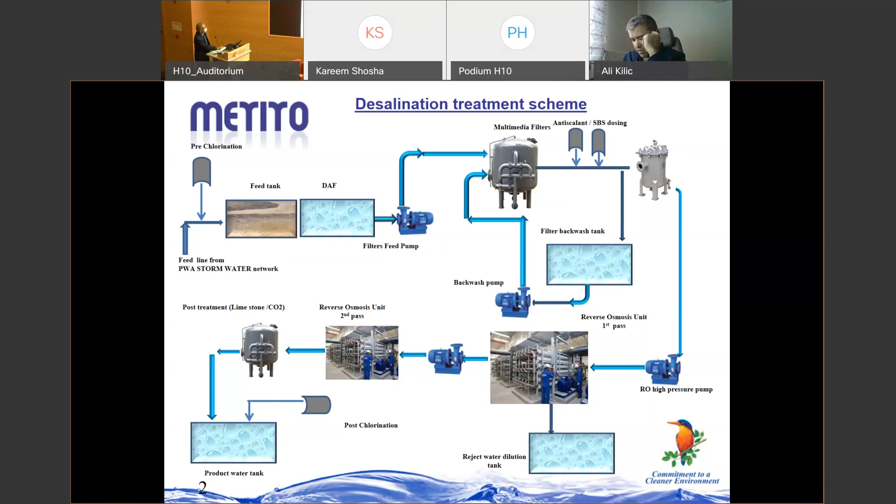So this is in broad what we call as a technology selection. So what is involved in this technology?

We all know seawater has algae, oil, suspended solids, total suspended solids (TSS), and a high silt density index. This is what is removed in the first three steps of pre-treatment.

Then you have chemical dosing systems to minimize scaling on the membranes. You also have to remove chlorine, because chlorine is poisonous for the membrane. So you do dechlorination using sodium bisulfite to remove chlorine.

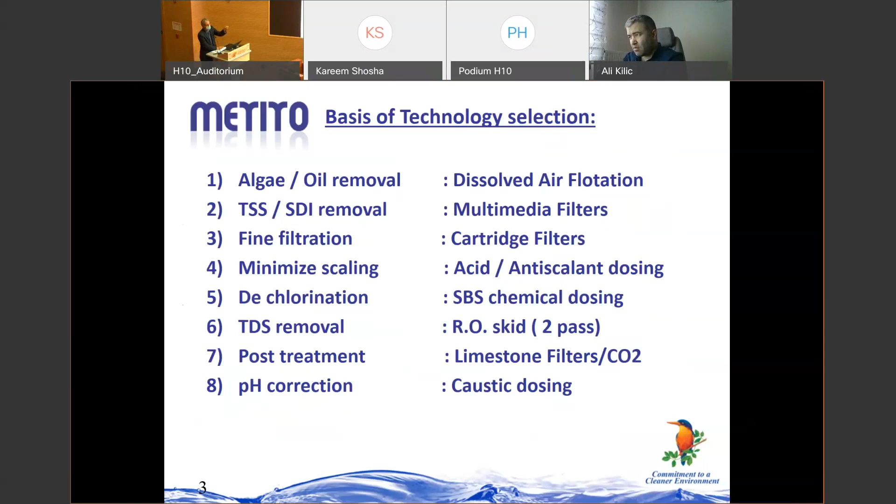And then, of course, the heart of the process, the reverse osmosis skid, post-treatment, and last but not least, pH correction, so that the water is suitable in case it is to go for drinking use. We have to correct the pH to make the water eligible for drinking.

Now, having seen the treatment scheme, let me jump into what the challenges are, and then I will move on to how we address these challenges in Metito using some innovative technologies.

Broadly, we have the major challenges. The first and foremost is a receding coastline. We know there is pollution due to discharge, especially in the Gulf. The Arabian Gulf is a very narrow strip of sea, unlike other areas in the world like the Indian Ocean or Pacific Ocean, which are more open. So in the Arabian Gulf, especially when reject water is discharged, it causes pollution. This is the most important challenge.

Due to the pollution, the clean water coastline is polluted, leading to receding coastline, not to mention construction activities happening all around us. The Pearl Qatar, for example, is a man-made island. It was sea 15 to 20 years back, but dredging turned it into a community. So that is what we mean by receding coastline.

Number two, algal bloom. There is a very interesting phenomenon specific to the Middle East, not happening throughout the year, but sometimes called algal bloom or red tide. Due to pollution, there is algae formation in the seawater, and especially in summer months, it can be very complicated. You can see a red patch of water, a red colored water. This has to be addressed.

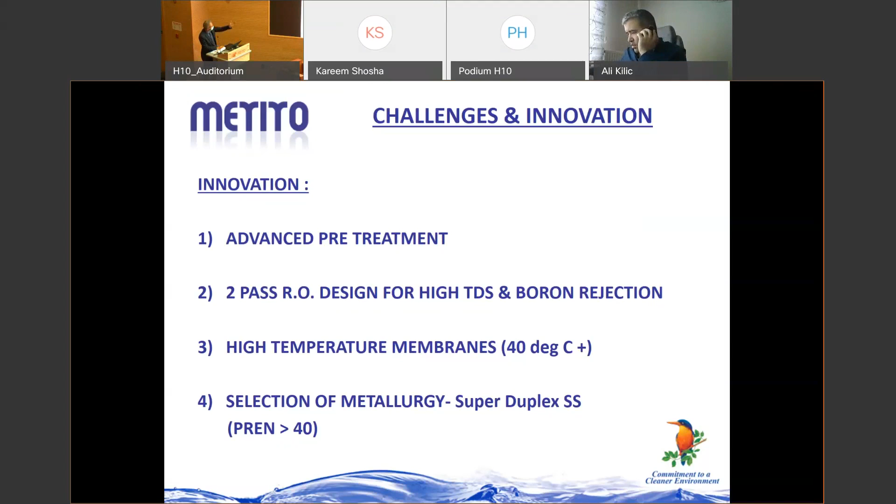Last but not least, the metallurgy. Because of the corrosion issue, we have to use exotic material, super special metallurgy, like super duplex stainless steel. We all know stainless steel and duplex stainless steel, but with the salinity in the Gulf area, they don't work, so you have to go for super duplex stainless steel. In technical terms, there is something called the PREN number, which has to be greater than 40 to ensure the metallurgy is sufficient for the long life of the plant.

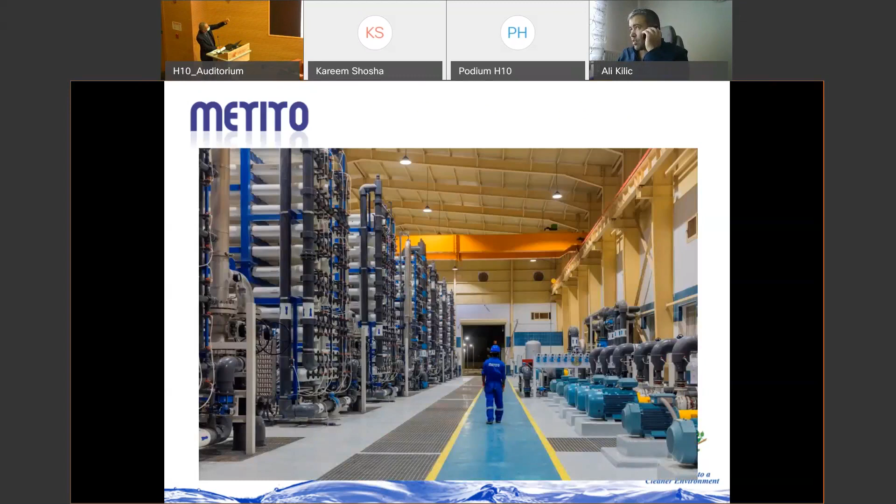These are the various points I wanted to touch upon. I know we have a limitation of time, so I will end my presentation by showing some sample photographs of how a typical reverse osmosis skid in the industry looks like. What you see here on the left side are the RO skids, the white pressure tubes. Inside those white pressure tubes, we house the RO membranes.

Here you see a clearer photo, a skid with the pressure tube, and each pressure tube typically has 7 to 8 membranes. This is a photo of a typical large desalination plant. That's all from my side. Thank you, and I'm open for any questions.

Thank you, Engineer Vignesh. Can we keep the questions to the end of the talks? Sure. Then we can just start the discussion regarding the three talks together. This is fine, thank you so much. Thank you.

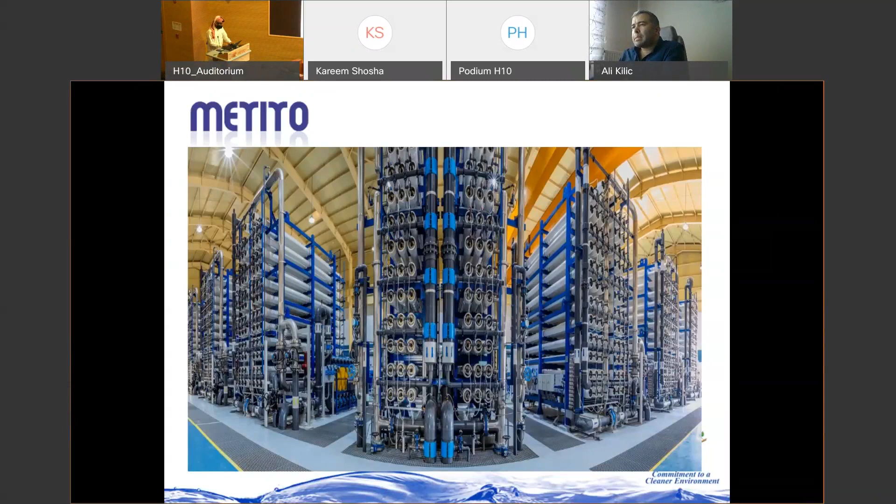Thank you, everyone. Now we will go to the second presentation by Professor Ali Kilic, associate professor at Istanbul Technical University. During his MSc and PhD, he studied engineered fabrics such as nanofibrous filters, polymer additives, electret aerosol filters, and related equipment manufacturing. He is also vice manager of TEMAG Labs, established in 2003 at the Gümüşsuyu campus of Istanbul Technical University. The studies are concentrated on the interdisciplinary field of engineered fabrics and the design and manufacture of specialty instruments for such materials. Focusing on novel fiber and nanofiber applications, TEMAG facilities are divided into filtration and separation, energy and composites, and biomedical labs.

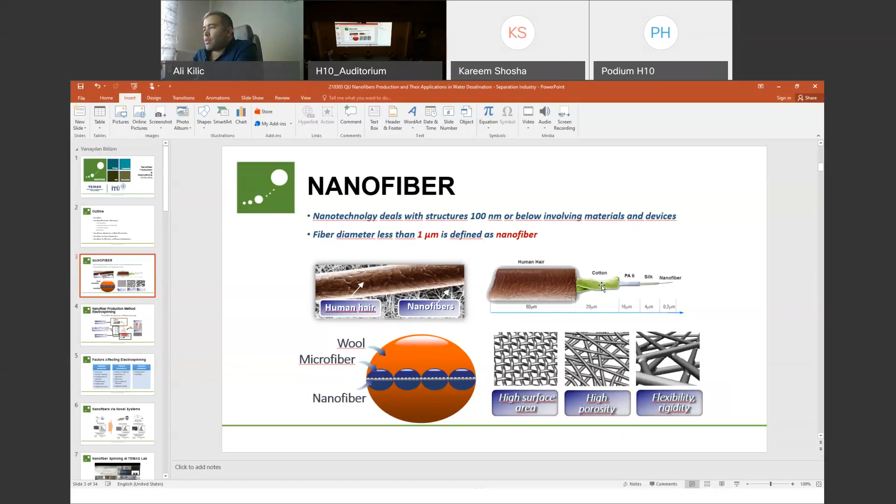This brings us very high surface area and very high porosity, and makes these materials very versatile. We can use them in various applications, from water desalination to aerosol filtration, from energy storage materials to medical applications. Here you see comparatively how they are made - they are pretty smaller than cotton or even silk fibers.

Mostly known as electrospinning, most laboratories over the world have an electrospinning system. This easily gives us an idea about the spinnability of some polymers, meaning that if we can form fibers using electrospinning, this polymer can be spun into fibrous materials to be used in textile or technical textile applications. As I said, electrospinning is quite a basic, easy system.

What we are doing is we have a syringe pump, a syringe to feed - regular medical syringes are used - and also a kind of collector, which can be moving or stationary. We apply a high potential between the needle tip and the collector, and under this huge electric field, it forms fibers by means of electrostatic forces. If we go through, we can see there are many parameters affecting electrospinning.

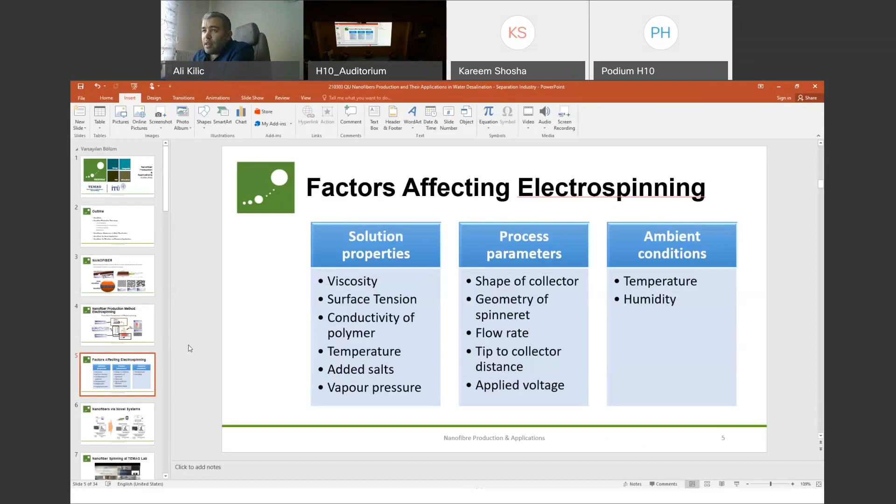Due to that reason, electrospinning is kind of difficult when we go for large-scale production. The main reasons we can mention are two. One is the use of very high potential, which increases safety concerns on electrospinning, plus it uses too much electricity - the electricity expenses go high. On the other side, since these electrostatic forces are kind of weak forces, the system's productivity is not so large.

So after I came back to Turkey, we focused on two novel systems in this regard. As I mentioned, we are using electrostatic forces, but we said what if we use compressed air? Using compressed air, we can form fibers again, and a larger mechanical force is applied to this polymer jet. After doing preliminary studies, we saw we were able to increase the feed rate to very high values, 10 times that of electrospinning. Since we have higher mechanical forces, the solution concentration can be larger. Another study we focused on was the use of centrifugal forces.

So we do have a special type of spinneret here, and by means of centrifugal forces, we are forcing the polymer jet to form fibers. These two systems are fully mechanical systems. Even for the centrifugal spinning system, we were able to increase productivity up to 30 milliliters per hour, just per nozzle. Again, due to use of mechanical forces, we can increase the solution concentration to 15%, which is quite important because this increases the productivity of the system.

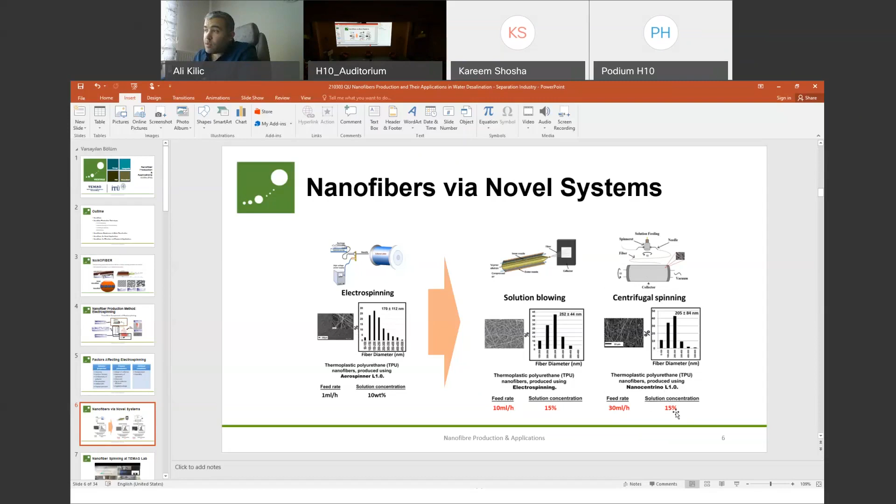I'm going to show you some videos so you can understand it better using this cartoon. I hope it's going to work. You can also reach it from YouTube, so you can easily see how the fibers are formed from this video. By the way, Areka is our spin-off company that produces these.

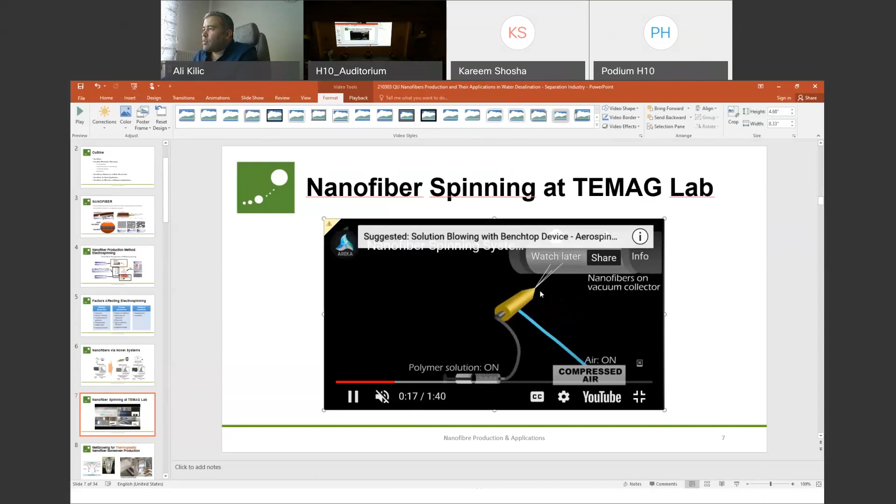I'm going to show solution blowing right now. Here, as you see, we have a collector. This is the lab scale system; we also have pilot scale systems. We have specially designed nozzles for this purpose. You probably see the fibers just coming. It's quite highly productive compared to electrospinning. By means of compressed air, we are forming the fibers, as you see.

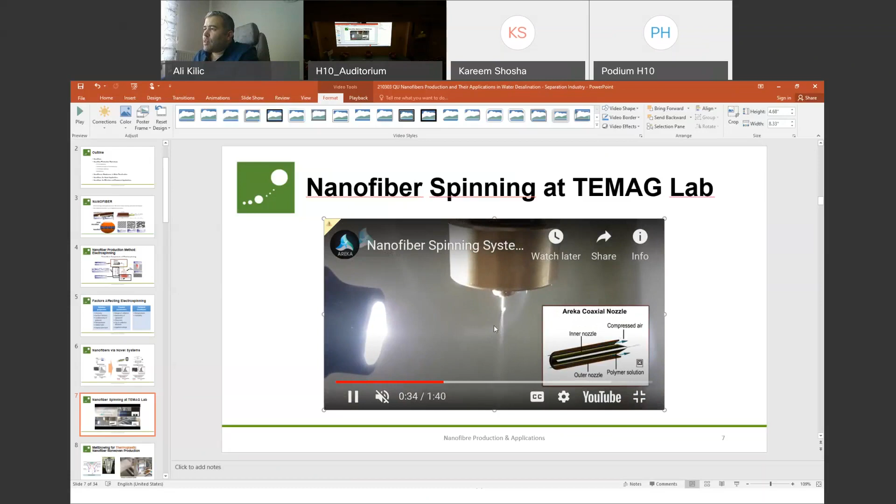So the Nanocentrino is our centrifuge spinning system. As you see here, we are feeding the polymer from here, and by means of centrifugal forces - I don't know if you can see the fibers here - they are very distributed. This is generally called the cotton candy mechanism. It's basically used for cotton candy production, but for production of membranes or filter products, we have to have a homogeneous, uniform surface.

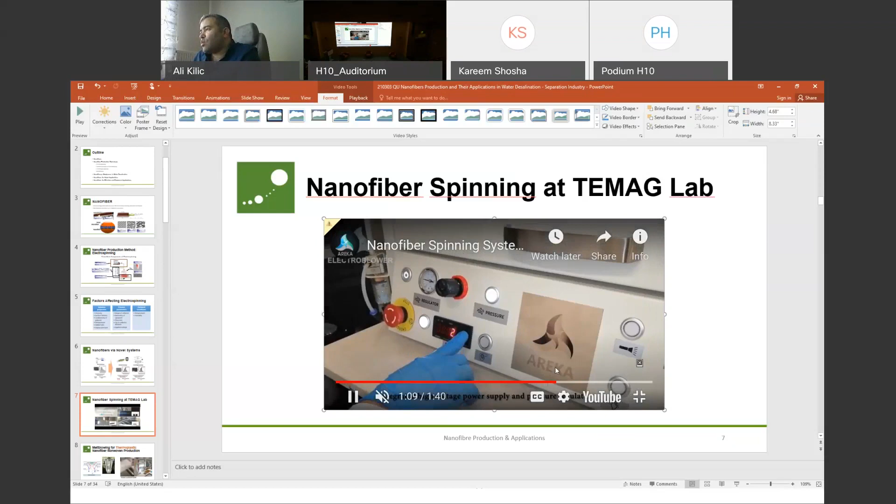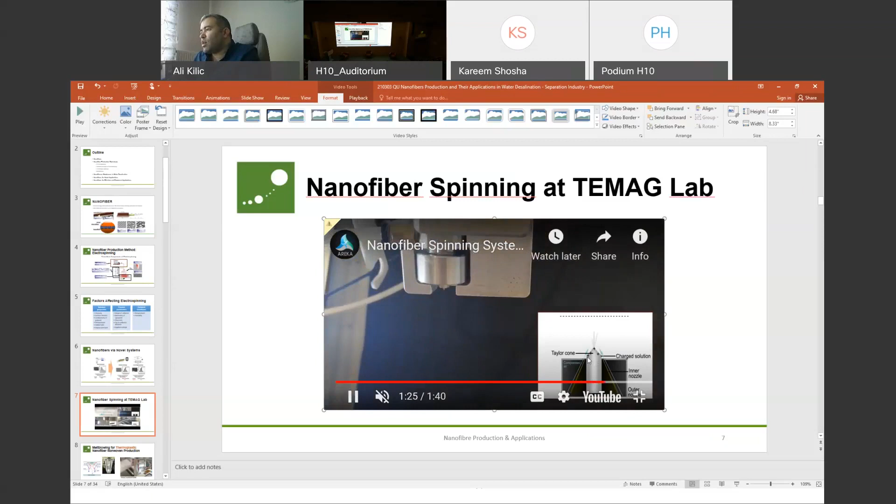What we did lastly is combine both systems, electrostatics and compressed air, in our latest product. By combining these two forces, we try to enhance the productivity plus maybe reduce the fiber diameter further below 50 nanometers. As you see here, we are utilizing both compressed air and charging of the system - these both are working in the system.

So these systems are pretty facile and versatile to produce nanofibers and make them useful for the membrane products we are using, membrane cartridges used in desalination. Another system - the world is actually looking for systems which are recyclable, so for that reason, rather than using solutions, we are using thermoplastic polymers to produce nanofibers, non-woven structures. Here, as you see, the system is quite versatile. It can go up to 150 centimeter width, and you can produce nano-microfibrous membranes using the same system.

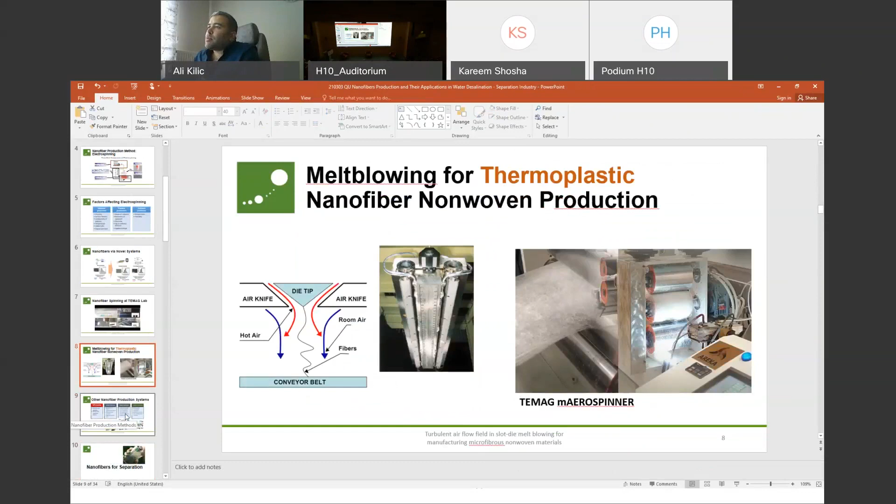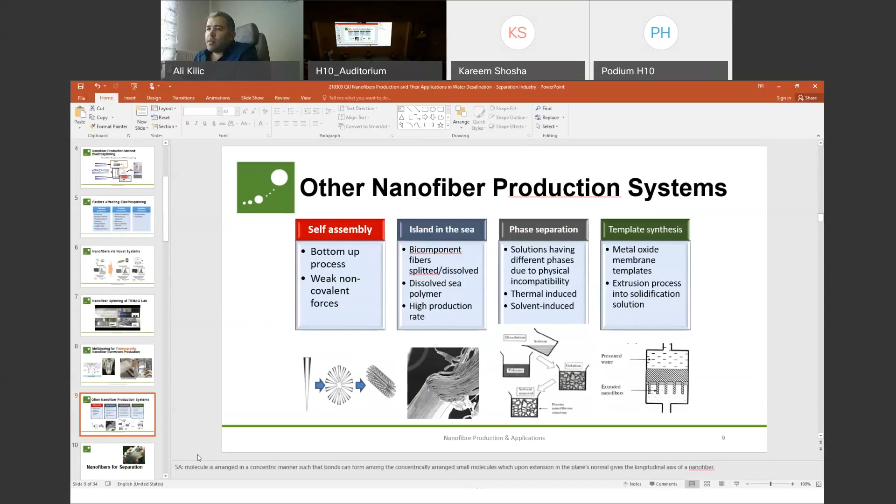So this is the melt blowing system, the fourth system I was able to explain to you. There are some other systems also - some of them are quite difficult to produce, some are material dependent. For instance, these are self-assembly, island in the sea, phase separation, and template synthesis. They each have advantages and disadvantages, so I'm not going to go into them, but I can answer your questions about these systems.

So what can we do with nanofibers actually? We are working with Dr. Javaid also on this. If we check conventional nonwovens, which are the substrates used in membranes, we are able to reduce pore sizes down to 10 micrometer pore size, meaning they are not so good for membrane applications. If you go to nanofibers, even down to 50 nanometers, since they have fibrous structures, it's quite difficult to reduce the porosity lower than 1 micrometer. So please keep this in mind.

Due to that reason, we make some modifications on these nanofibers - if we press on them and make them more like a porous membrane structure, hot pressing is one method, and we can also use cross-linking techniques. At the end of the day, the best performance we were able to obtain is using the nanofiber layers as the mid layers - fibrous mid layers with high tortuosity. Due to that, use of nanofibers, especially in our membranes, gives us the opportunity to achieve high water permeability. For that reason, interfacial polymerization is generally utilized.

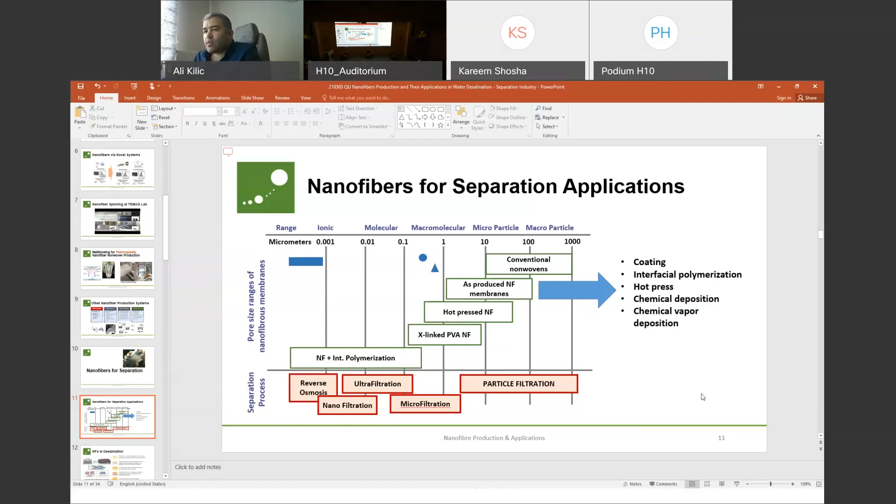You can design your materials down to reverse osmosis, nanofiltration, and ultrafiltration membranes. Here are some examples from different applications. For instance, graphene oxide is also used to set their morphology. You can make some changes on your nanofibers, whatever the nanofiber, through chemical modifications, or go for CVD applications. So those systems are very possible.

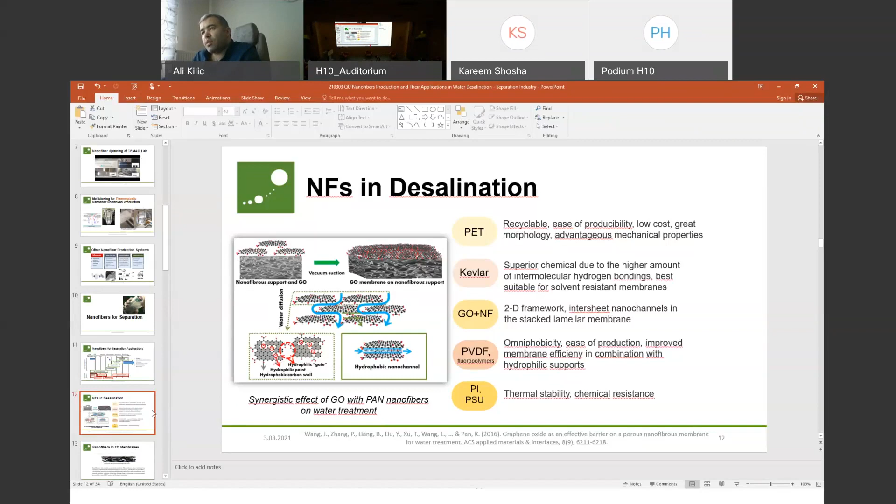Imagine if you do not use nanofibrous mid layers, you would use phase inverted membranes as the mid layer. But these nanofibrous layers have high porosity, meaning water can penetrate easily through this mid layer. Otherwise, if you don't use nanofibers, you'd use a microfiltration membrane under this interfacially polymerized layer, which causes a lot of pressure resistance for the water to permeate. For desalination purposes, we have to concentrate on these mid layers, and if we put something over them, we can enhance the performance to a much larger degree.

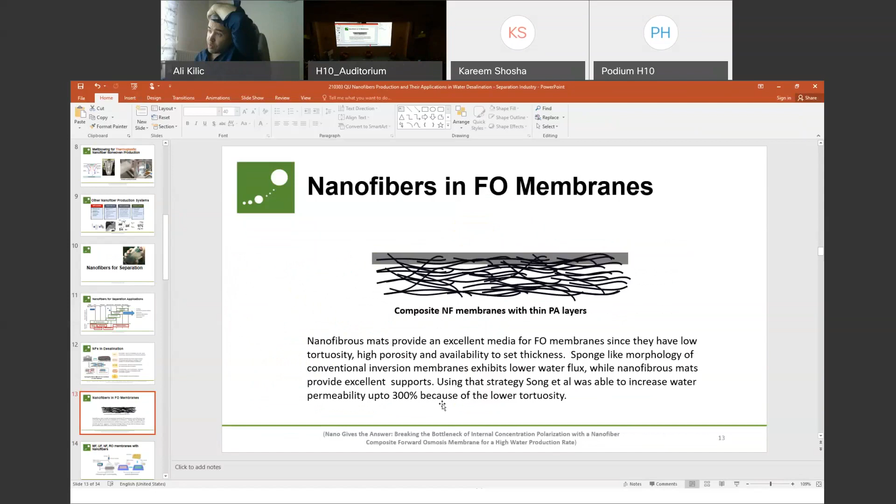There are some novel applications other than reverse osmosis membranes. Nanofibers are also doing good in this regard. They are used in some FO membranes, and in some studies, they were able to increase water permeability by up to 300%. Here you see the main mechanism: we first produce the nanofibers over our substrates, and after that we perform interfacial polymerization to go for reverse osmosis, nanofiltration, and microfiltration membranes.

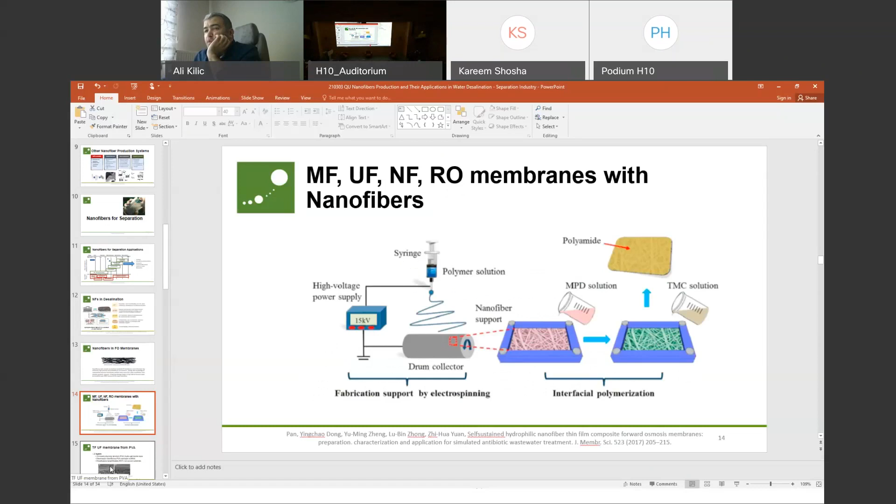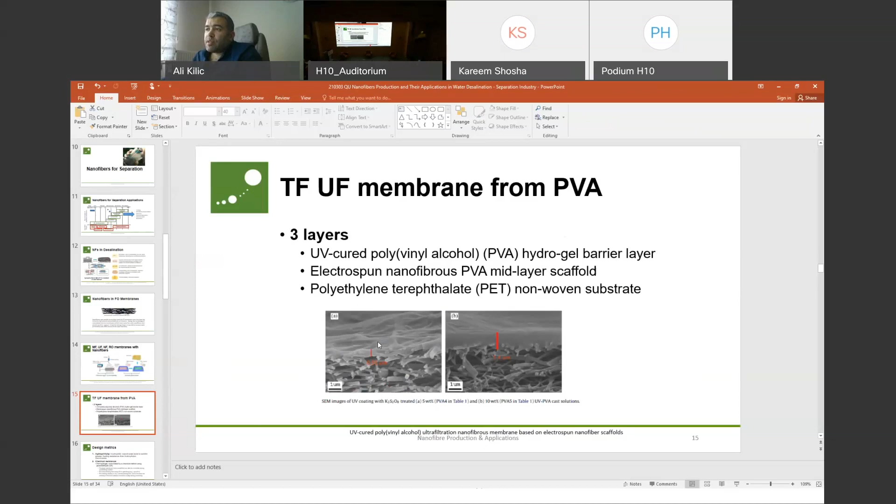If we manage some changes in the structure, we can also reach similar membrane performance. For instance, PVA is a very environmentally friendly material. If you go for UV curing over these nanofibrous layers, this also forms a kind of membrane structure, which can be used for nanofiltration and ultrafiltration applications. Nanofibers give us the opportunity to follow the requirements of water filtration.

For some specific applications like membrane distillation, we may need super hydrophobicity or hydrophobic surfaces. This is also possible with nanofibers, since it mostly depends on the chemistry of the selected polymer. We can easily arrange the hydrophilicity and the chemical resistance. For instance, even for PVA, which is water soluble, if you go for some cross-linking, the PVA nanofibers can withstand the required chemical resistance.

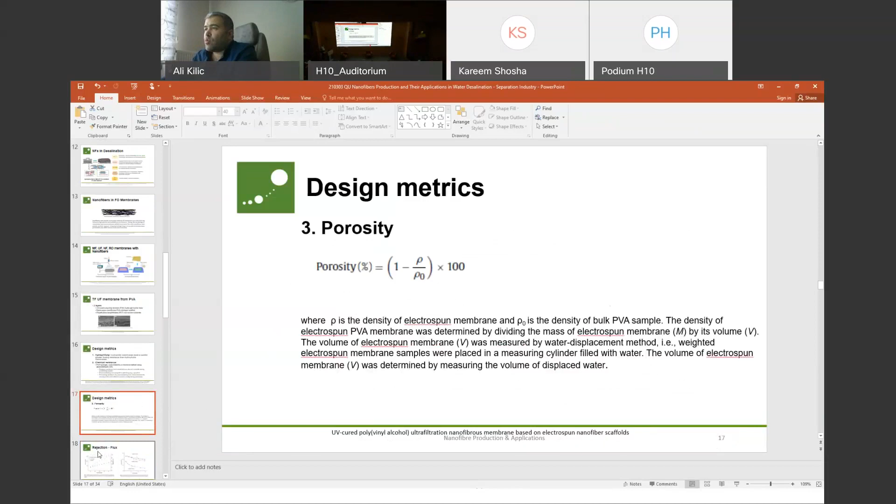Other parameters, as I said, like porosity—this is basically where nanofibers perform best for membrane production. We have high porosity compared to other membranes, and this porosity allows the permeation of water, which you can see here, from a resource. As you see, for regular membranes the flux is quite low. If we go for nanofibrous structures, even with very similar rejection rates, you can increase the flux by up to 50%. This is quite a good number, I believe—a nice improvement for producing membranes. Compared to traditional systems, I strongly believe this is going to work in the coming years.

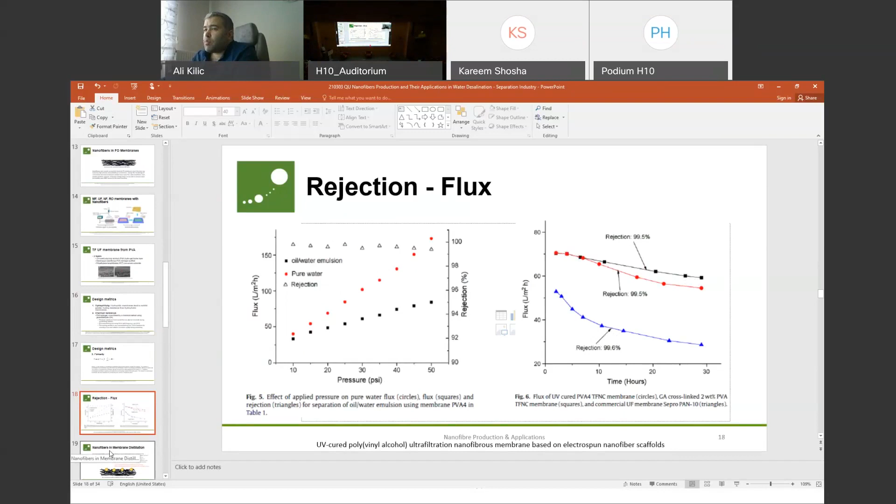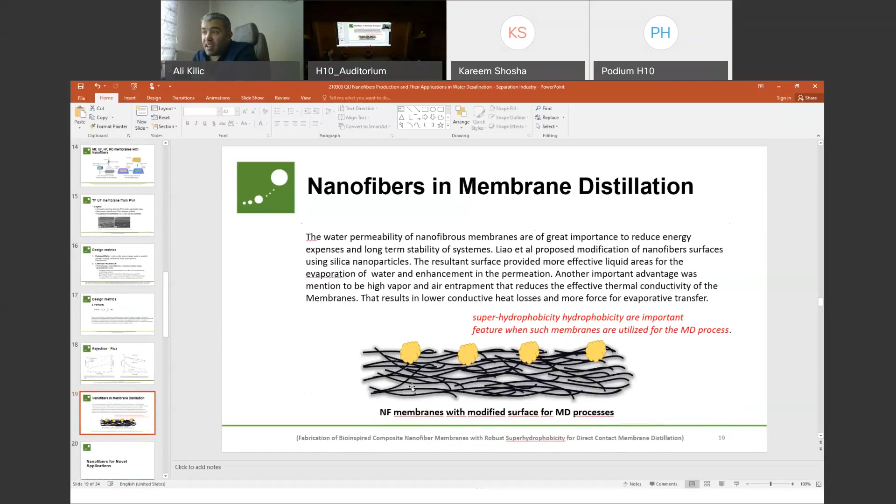There are also other applications of membranes. Membrane distillation is one of them. Here we can also arrange the surface properties, and we can change the tortuosity that water penetrates through. This kind of tortuosity can very much be arranged if you go for nanofiber production systems.

There are also some novel applications that are really doing good. Nowadays, people are working a lot on this, even in industry, not only academia. For instance, one basic idea is one successful application of nanofibers and these fibrous structures for water reclamation: use of water harvesting, similar to fogging systems.

Nature gives us very nice ideas in this regard. For instance, this is taken from a specific beetle—if we use that, we can easily harvest water from fog. Even this animal was created with such a nice surface chemistry that, due to this surface chemistry, it never drinks water. Utilizing the humidity changes during nighttime and daytime, due to this super hydrophobic and super hydrophilic surface structures, this animal can easily capture water as droplets, and these droplets go straight to its mouth, obtaining water through this mechanism.

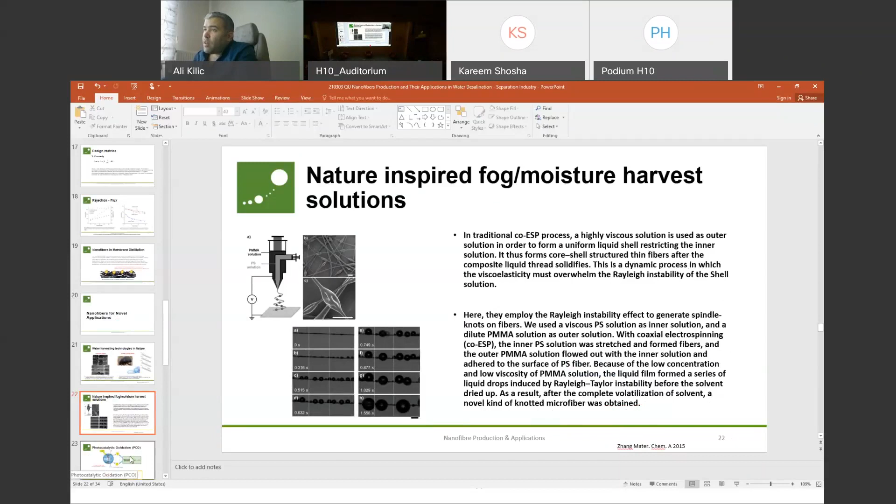These are some systems mimicking the structure of these insects. If you go for spider silks, they are changing the structures accordingly using nanofibers, and water harvesting was also possible this way. Another quite interesting idea—and this has gotten quite long already—we can utilize photocatalytic oxidation, which is used in both water and air filtration studies.

So generally titanium dioxide or zinc oxide are the basic materials. These are used for photovoltaic applications as well. Since they are producing some oxidants in the structures, we can somehow obtain clean water using these systems also.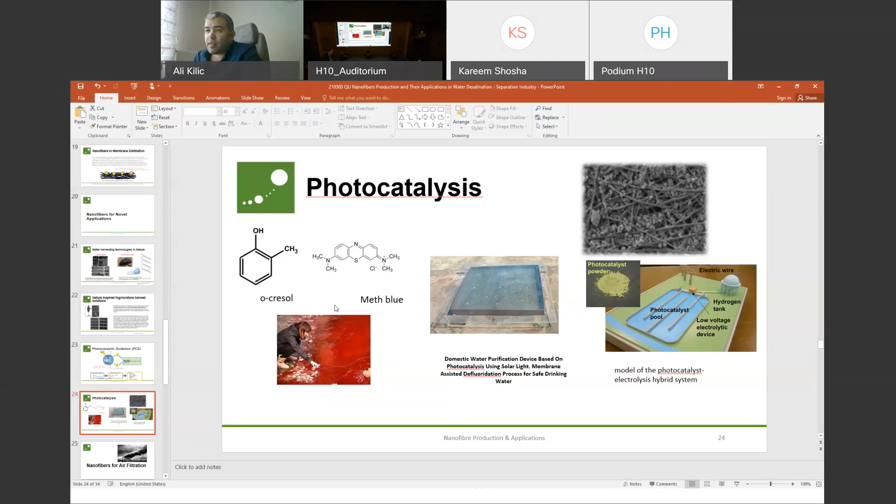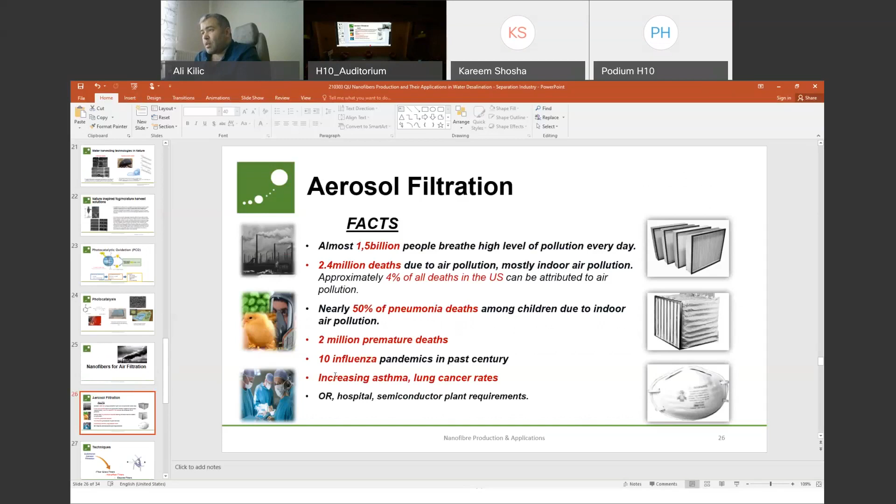As you know, due to this pandemic, we do have quite important things ongoing with air filtration. Air filtration became very critical all over the world. There are some numbers I'm not going to mention, but especially these pandemic conditions and indoor air pollution is quite problematic, and they are also used in hospitals and many plants. So for that purpose, also nanofibers find applications.

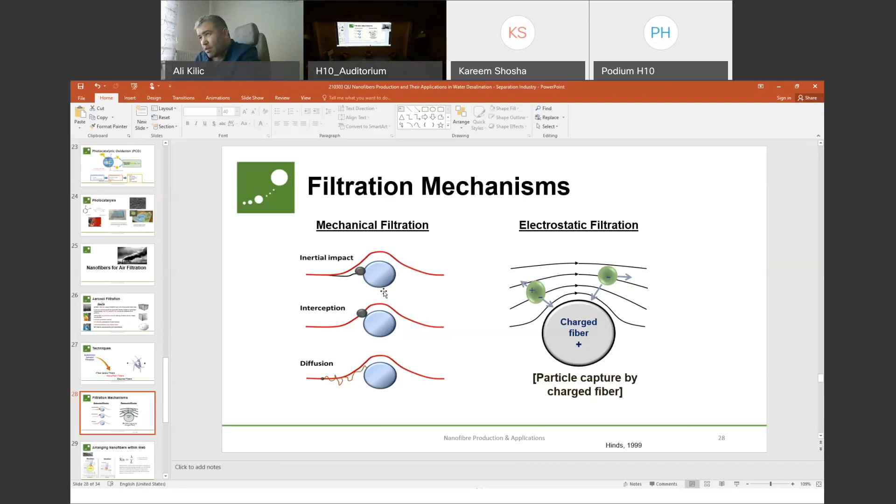This is kind of different compared to membrane separation techniques. Air filtration is not like this similar separation technique. For air filtration, we can capture particles from different distances, and there are some mechanical filtration and electrostatic filtration mechanisms. So we follow these mechanisms. If we reduce the porosity of the samples, again, we are able to enhance the filtration performance.

Another important gain when we use nanofibers is the flow again. If I sum up, nanofibers are basically increasing the flux or flow rate, even for air or water. If we reduce the nanofiber diameter below 100 nanometers, the air, when it hits it, makes a motion called slip flow, meaning that the velocity of air does not drop to zero as it does for microfibers. So when we use nanofibers, the air just slips over them, and due to that reason, we get lower pressure drop. This is again arranged by the nanofibers, and this is a graph for penetration and clogging.

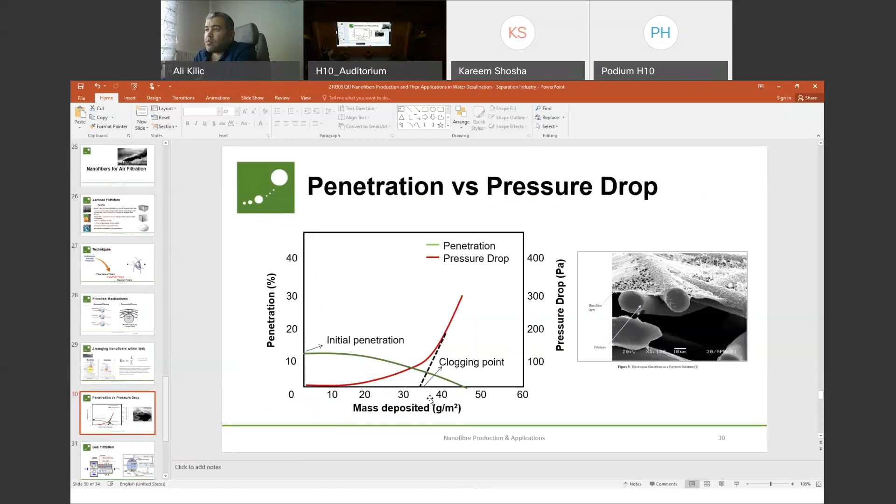This is for air filtration, and again the similar structure might be used. Photocatalyst, I already mentioned this mechanism. This is also used to remove any kind of odors, any kind of VOCs in the air. So the same is used for these structures, we are using again nanofibers.

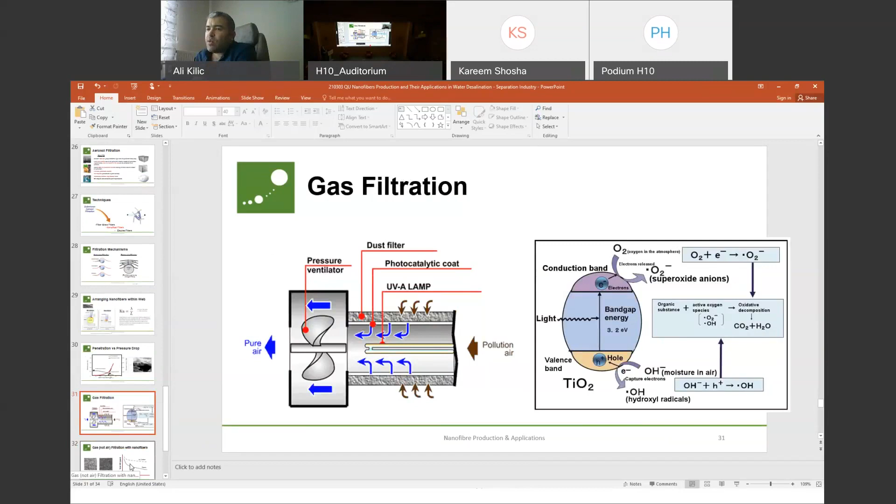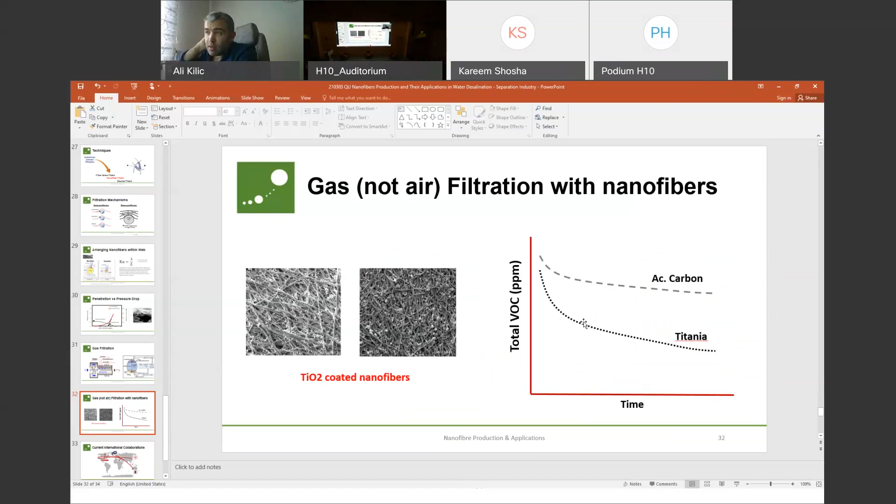For gas filtration, this titanium dioxide coated nanofibers are quite useful materials. And regularly we are using activated carbon, as in the case of water filtration things. But if we go for titanium dioxide, we can easily reach better VOC removal rates.

So here there are some current international collaborations that we are holding, and we are very lucky that, alhamdulillah, we are collaborating with Dr. Javait in this case. We already signed a memorandum of understanding with Qatar University. We are very happy to do that. And with all our facilities to produce these nanofibers to make their tests, we are ready for future collaborations.

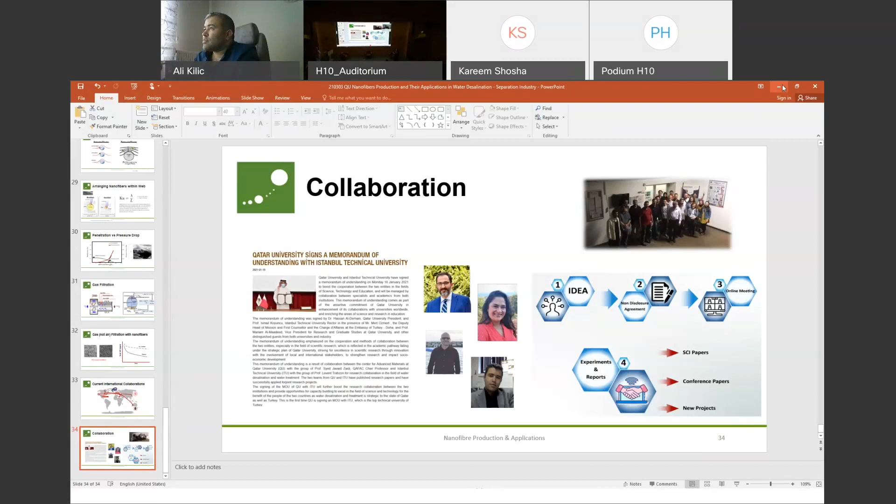Muslim University in India, and his master's degree from the Chemical Engineering Department at King Fahd University of Petroleum and Minerals, and his PhD from the Chemical Engineering Department at Laval University, Canada. He has more than 25 years of teaching and research experience in the area of clean water and clean energy. He has worked at King Fahd University of Petroleum and Minerals, Saudi Arabia, the University of Queensland, Australia, Laval University, Canada, and has been a visiting scholar at the Massachusetts Institute of Technology, USA. He has extensive experience in desalination research and has supervised many graduate students in clean water and clean energy disciplines. He has published more than 300 papers in international journals, book chapters, conference proceedings, and has 14 US patents and patent applications. He has conducted joint projects in reverse osmosis desalination in collaboration with the Massachusetts Institute of Technology, USA, for the development of nanostructured membranes for reverse osmosis water desalination.

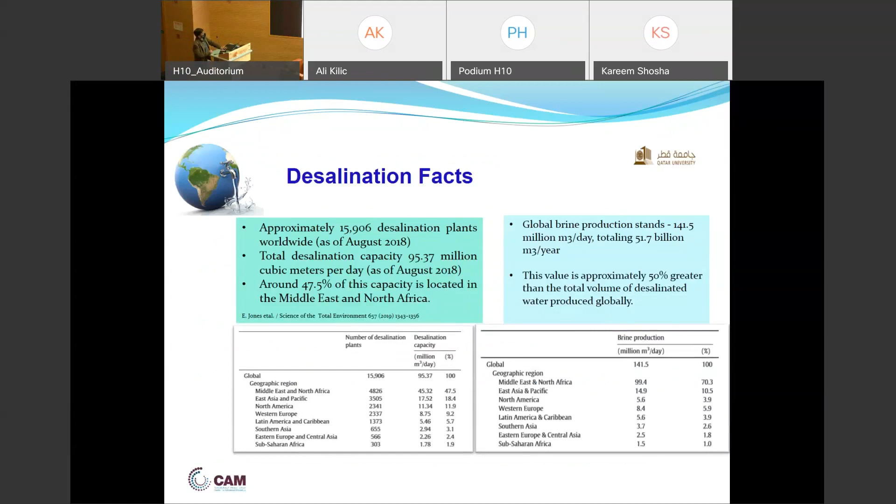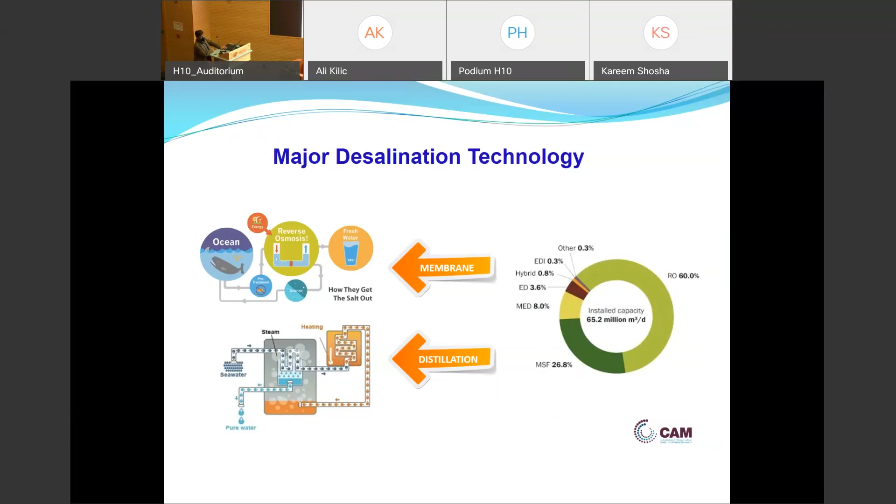There are two desalination technologies: thermal-based desalination and membrane-based. In the beginning, most desalination plants were based on thermal technology, which is multi-stage flash and multi-effect desalination, and in the Middle East they were based on that. But worldwide, the trend is that more than 60% of plants are now based on RO desalination because of energy efficiency and environmental effects.

As you can see here, this is RO desalination's specific energy consumption and carbon footprint. With different technologies, RO has the lowest carbon footprint and the lowest energy consumption. That's why people are moving from thermal to RO, which is more environmentally friendly and uses less energy.

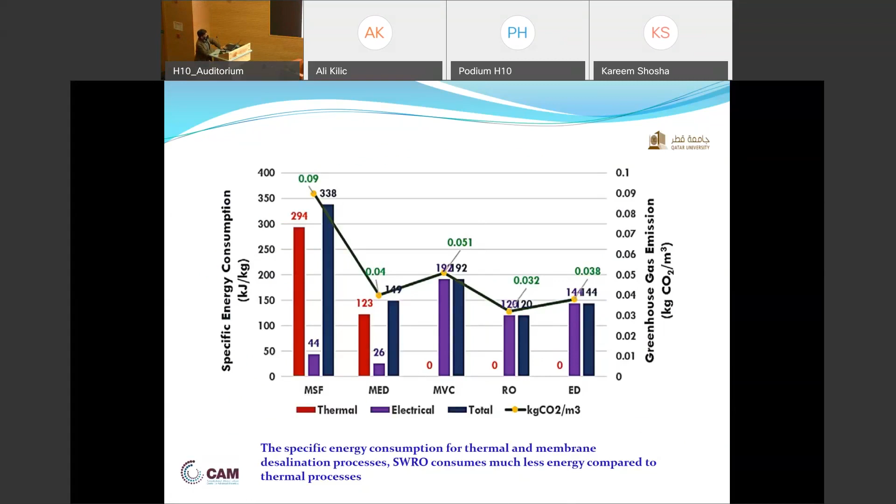Now coming to Qatar. Qatar, as you know, is surrounded by water on three sides, and we have no access to fresh water. So it is very strategically important to the State of Qatar, and water is one of the grand challenges of our National Vision 2030.

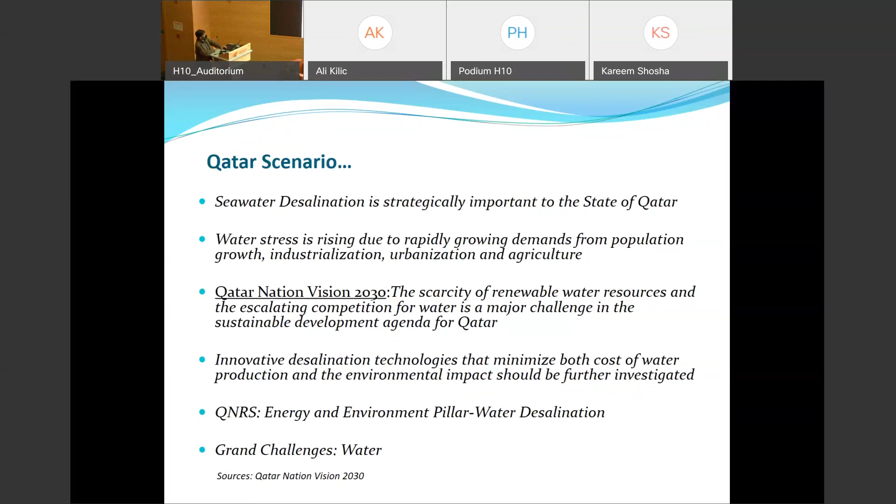They have been working on innovative technology development to minimize the cost of water and reduce environmental effects. Qatar has an absence of natural fresh water, minimal rainfall, high evaporation rate, and due to urbanization, massive infrastructure development. The industrial water demand has been increasing, as well as domestic water demand.

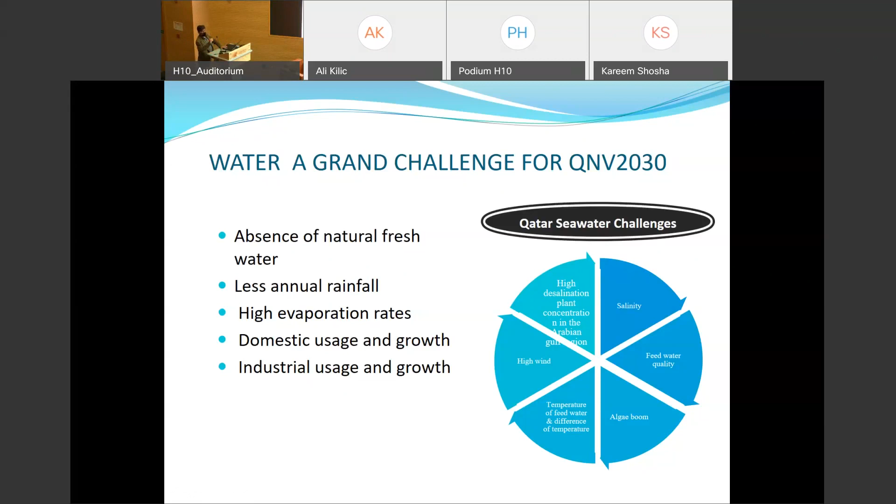At the same time, there were challenges because, as mentioned by the previous speaker from Metito, the water in Qatar is very complex. It has high salinity, high TDS, algal blooms, high temperatures, high wind, and turbidity, putting more pressure on pre-treatment technologies.

This is about the total desalination capacity. As we see here, more than 60%, specifically 65%, of desalination capacity is in the MENA region.

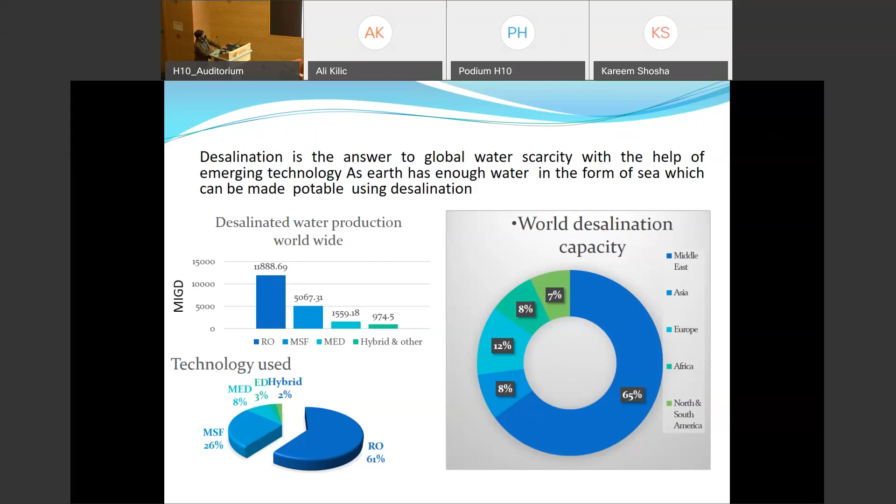Worldwide, you see here that the trend for technology is moving toward RO. But in the Middle East, in the beginning, all our plants were based on thermal desalination. The reason was low energy cost because oil is abundant and cheap, and at the same time there was co-power generation, so they were producing power with mega plants. Now the shift is changing from thermal to RO.

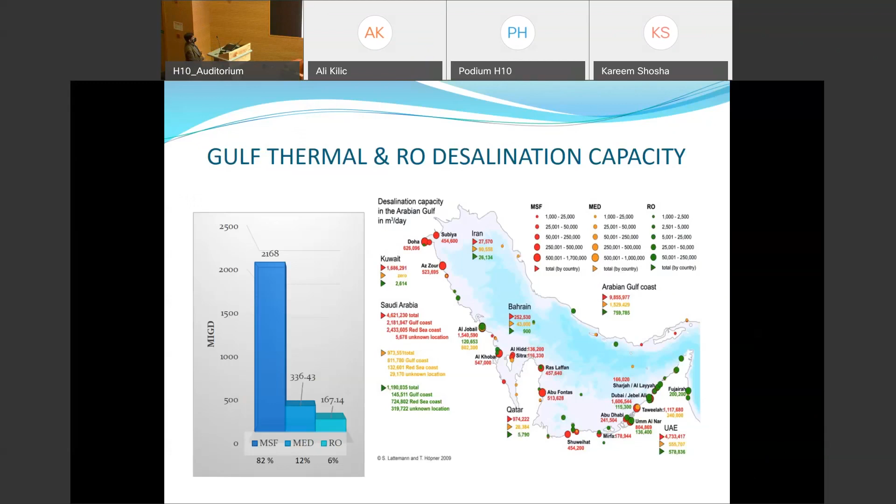It was 6%, as I told you, because of the low energy cost, they were based on thermal desalination. Now the trend is changing. You can see here the RO has grown from 2012 until 2018. The share of RO has increased from 12% to 24%, more than around 175% increase, whereas the trend for other thermal is stable.

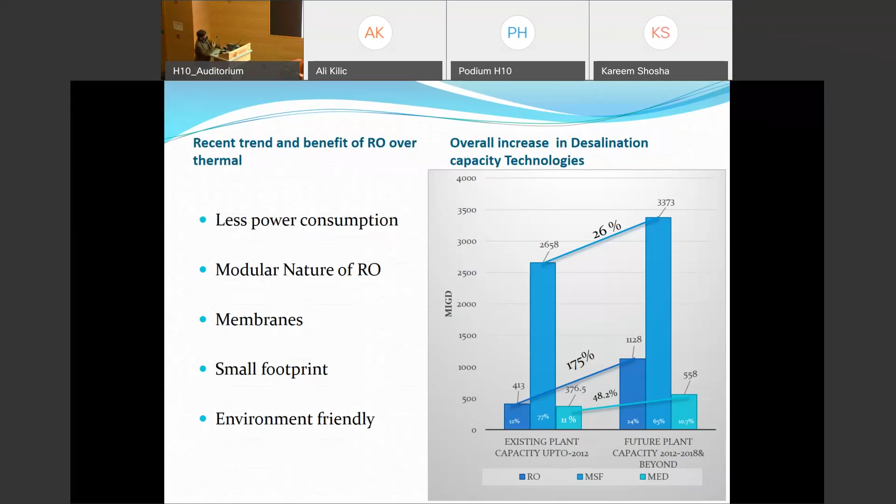So because of less energy consumption, they are modular in nature. You can have big systems, small systems, whatever is based on the requirement, and they use membrane and a small footprint. There's very low emission of CO2, and they are environment friendly.

Coming to Qatar, as I told you, 75% of the technology was based on MSF, and RO share was only 1% before 2010. Now after 2010, the new plants were built in Qatar on the mega scale by the government of Qatar, QEWC, Qatar Electricity and Water Company. Now the share of water of RO technology has increased around 40%.

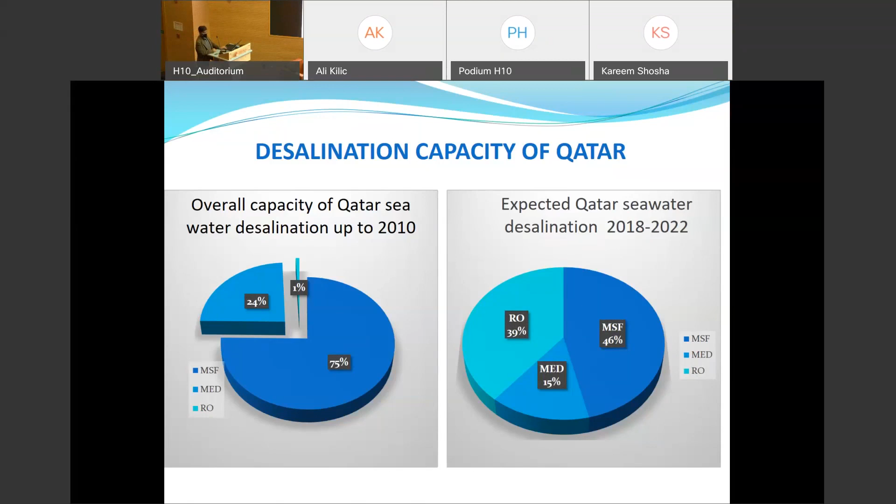So you can see here there is a jump, a shift, an exponential shift of technology from thermal to RO in Qatar, which is exponentially increasing. That is, more and more plants are coming again.

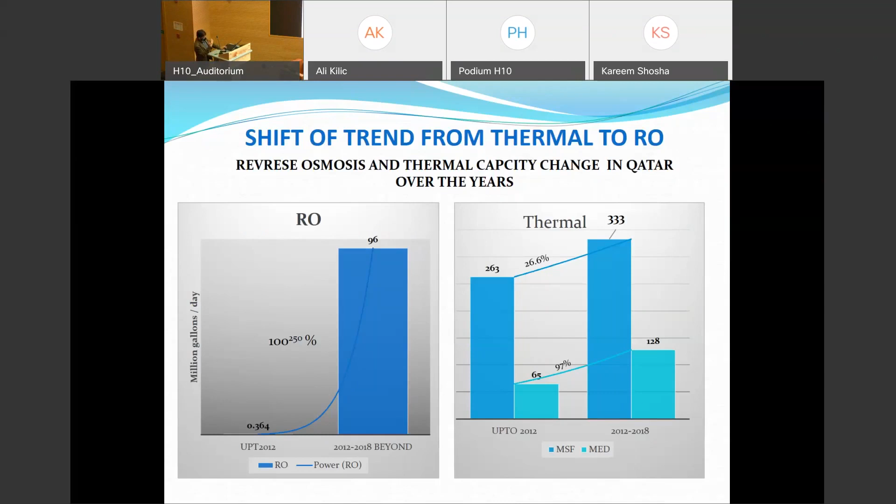Giving these few facts, now this is a schematic of a typical RO process. It has two sections: we have pre-treatment, we have the membrane section, and we have post-treatment. As has been explained by Mr. Varghese, we're giving some detail, but pre-treatment is very important in order to protect the downstream membrane for RO.

So here there have been a lot of innovations, as we mentioned. Here they are using dissolved air flotation, which has not been used in other parts of the world because the complexity of water is not as complex in other parts as here. So they have also been using ultrafiltration, like in some plants in Saudi Arabia, in Dubai and other places.

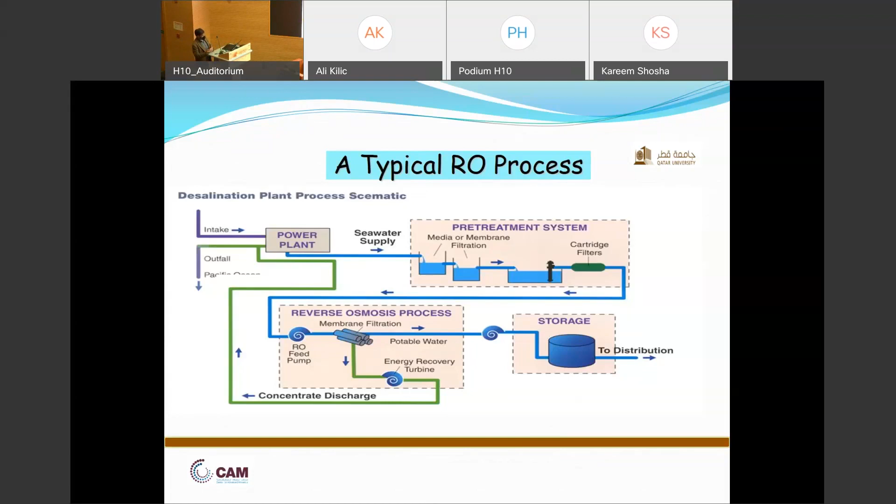Now the heart of the process is RO, because RO membranes approximately contribute around 30% of the cost of the total desalination plant. And the RO membranes, there have been a lot of development, but in order to increase efficiency and reduce cost, a lot of innovation is taking place in this area.

So we also have been working on the development of the next generation membrane, which we call TFC, or advanced thin film composite membrane. There are two types of membrane which have been used in RO: one is based on cellulose acetate, we call CA, and the other, a later generation, called polyamide thin film composite membrane.

The CA membranes are susceptible to biological attack and have limited chemical stability and low pressure tolerance, so this led to the development of the TFC thin film composite membrane. The polyamide TFC membranes are now the standard of the industry and have been widely used, but still there are some issues.

This is how the structure of a membrane looks, consisting of three different layers. One is the top layer, which is the main separating layer, and it is very thin, less than 1 micron, about less than half a micron, we can say 1/10 of a micron.

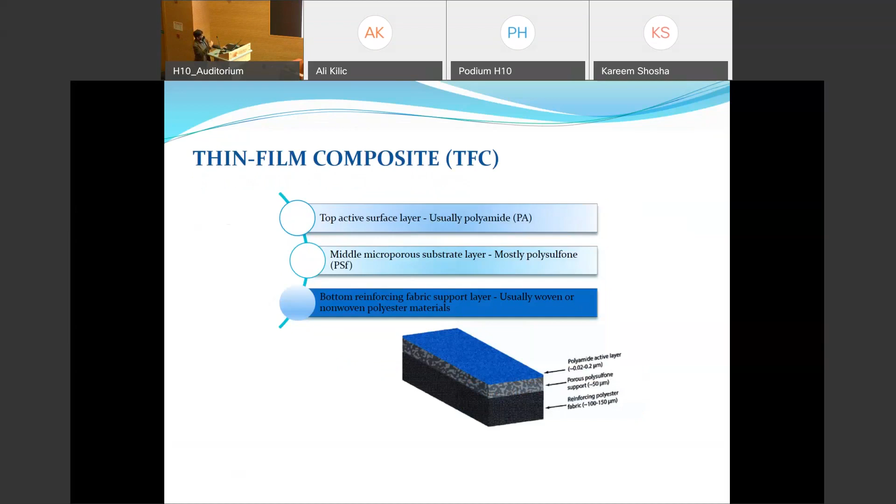Then you have the middle layer, which is made of polysulfone, and that provides pathways for water. And we have the polyester layer, which provides the mechanical strength. This is how the structure of a thin film composite looks.

So the benefit of TFC is that each layer can be controlled independently. You have desired permeability and selectivity that can be achieved. It has good compression resistance as well as excellent mechanical strength, but in spite of that, there are some limitations and drawbacks.

For example, they are not resistant to chlorine, so a separate treatment for dechlorination has to be done before the water goes to the RO process. They are also sensitive to fouling, especially biofouling, because even though RO technology is very mature and well developed, biofouling and organic fouling still remain an issue. And there is inadequate boron rejection efficiency.

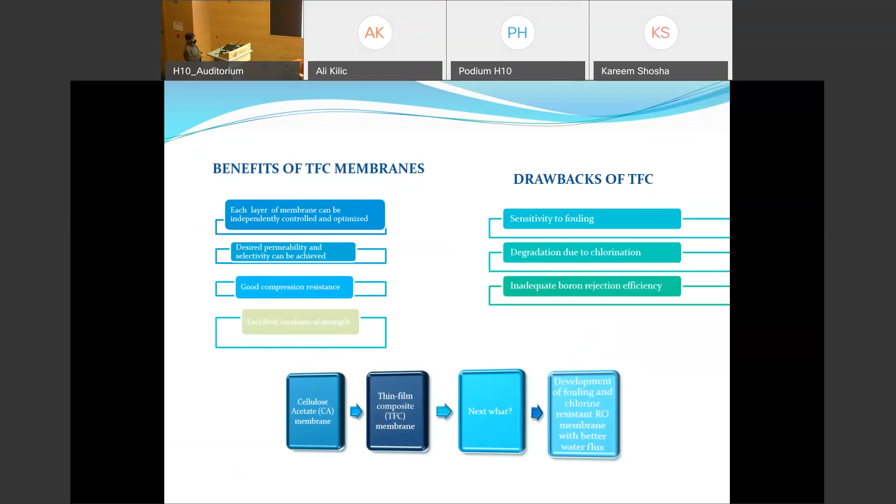So we have the development of cellulose acetate membrane, we have TFC polyamide membrane. Now people are working a lot on the development of the next generation of membrane, for fouling resistant, chlorine resistant RO membranes with better flux.

At Qatar University, we have also been working on the development of RO membranes, using two different approaches. We have used nanomaterial - as you know, nanotechnology is playing a big role in each field of life, in our research, in our scientific community, so a lot of nanomaterials have been used and proposed. We used two different kinds of nanoclays, which are abundantly used, naturally occurring and cheap materials, and also a different manufacturing or fabrication technique.

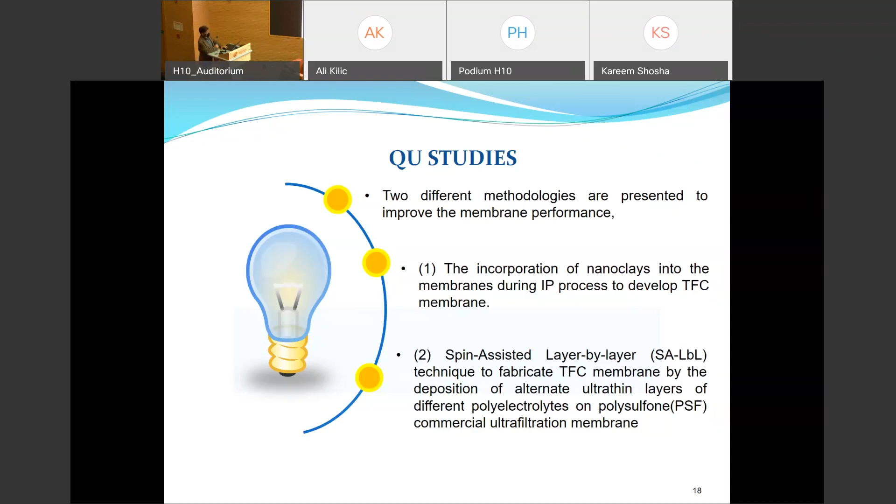The currently used TFC membranes are made by interfacial polymerization, which involves some complex manufacturing processes. So we tried to make a simpler process. These are the two studies we undertook.

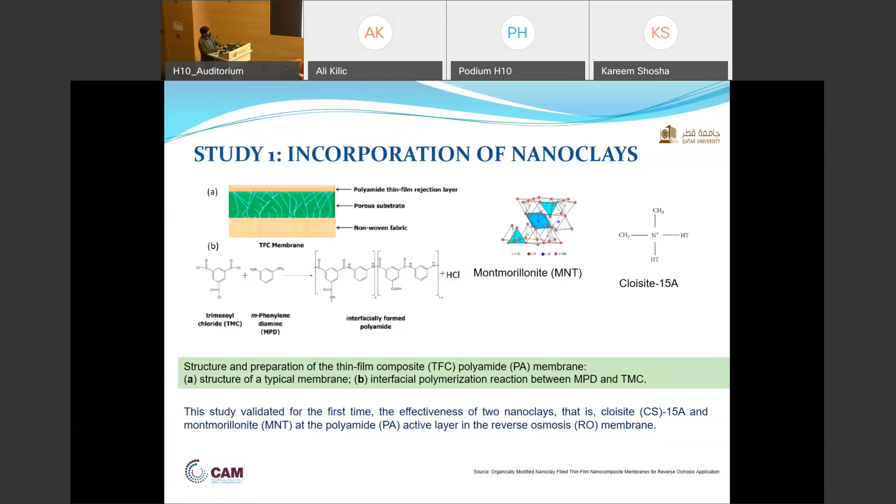We used two nanomaterials, one called montmorillonite and the other Cloisite, and they are incorporated into the thin top layer of the polyamide in very low percentage, less than 1%, 0.2 to 0.5%. This is the first time we have validated the effectiveness of these nanoclays.

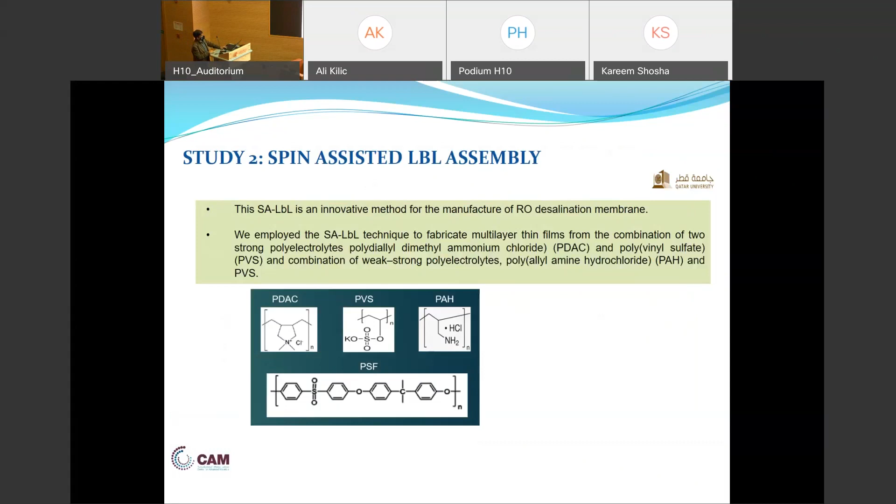The other study is based on a technique called layer by layer deposition, or spin-assisted layer by layer assembly, where we used two different electrolyte pairs - combinations of strong and weak electrolytes, PDAC, PVS, PAH, and PSF, on the polysulfone support. Here the idea is we did not use interfacial polymerization at all, to completely eliminate the PA layer, and instead used a combination of different electrolyte layers - positive charge and negative charge layers deposited one after the other.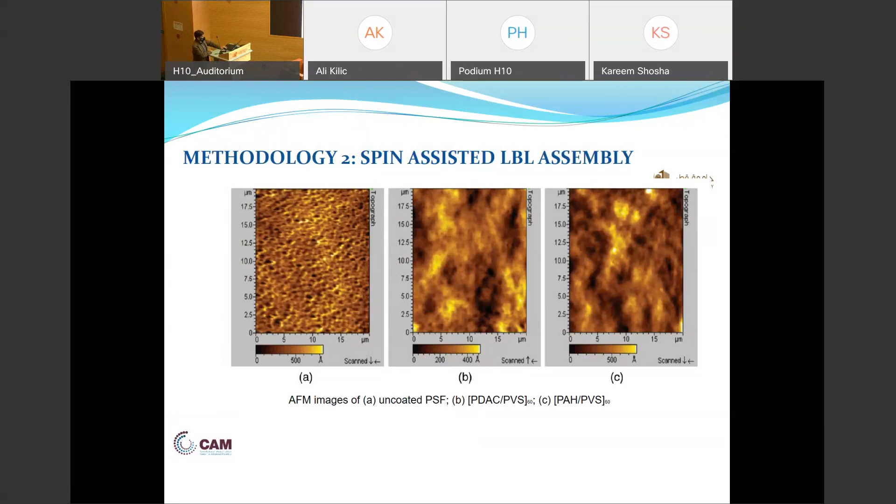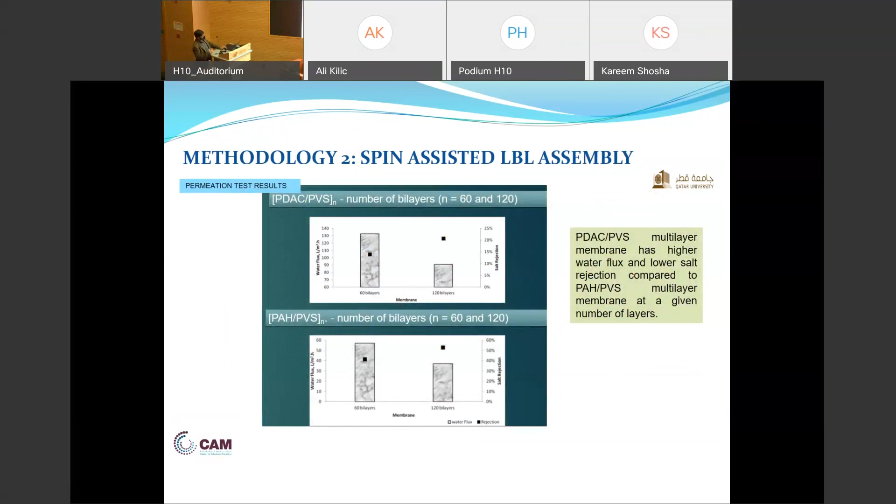Our study demonstrated that these TFC membranes are promising, and these novel fabrication techniques are great tools to manufacture RO membranes. We are still optimizing and studying further to improve the technology. Importantly, the key drivers for commercialization of this technology need to be identified in order to expedite industry adoption in the near future.

We have an industry partner here, so I'm mentioning that we have been partnering with Metito on different projects, CRP and other projects. I'd also like to mention we have established a water technology unit at Qatar University under the umbrella of the Center for Advanced Materials, under the leadership of Dr. Nasir Al-Naimi, our director. We are collaborating with industry, and we are open for industrial collaboration as well as academic collaboration overseas, and we are trying to establish this as a whole center. Thank you very much for listening.

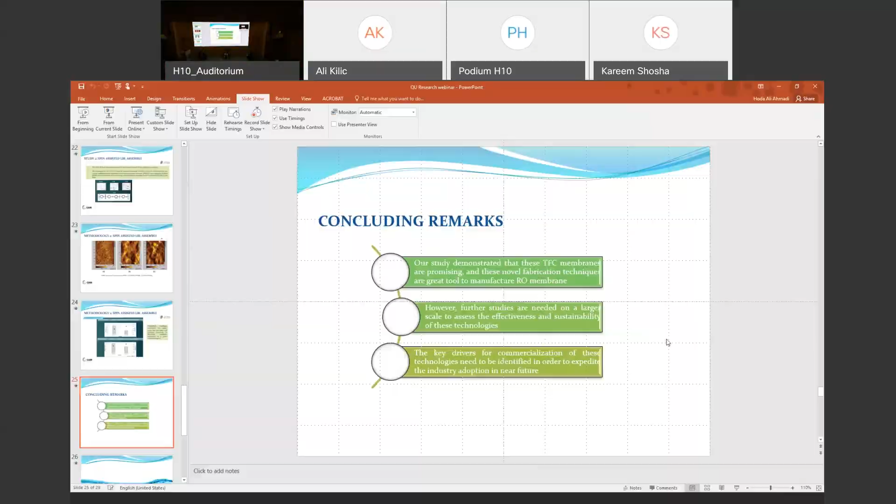As high as 20,000 milligrams per liter. So yes, to answer your question specifically, there are different types of exotic materials available. Other than super duplex stainless steel, we also have something called CD4MCU. We have titanium. But when we compare the cost, typically we have done that exercise in Metito on large scale projects, all of them are in the same league of high exotic cost. So what happens is we need to also look at the commercial availability of these materials.

When we talk of the high pressure pump, it's not only a theoretical selection, but we also have to look at whether pump manufacturers in the world find it commercially viable, what is the range of the pump selection. Similarly, for the piping, we have to strike a balance with super duplex stainless steel availability, because there are a lot of challenges, especially in terms of production of very specific metallurgy of pipes in the desalination industry. So there are a couple of factors, but yes, we do look at different materials before taking a final call on what is to be selected.

Thank you. My question is to Dr. Ali, Professor Ali Kilic from Istanbul University. Regarding the scale-up of nanofiber production, this is number one. And number two, the production of nanofibers has some challenges, for example the stability of the morphology, effect of humidity, and so on. So how can you target such challenges, and what do you say about the scale up of the nanofibers? Is it an easy process, or does it also have some challenges?